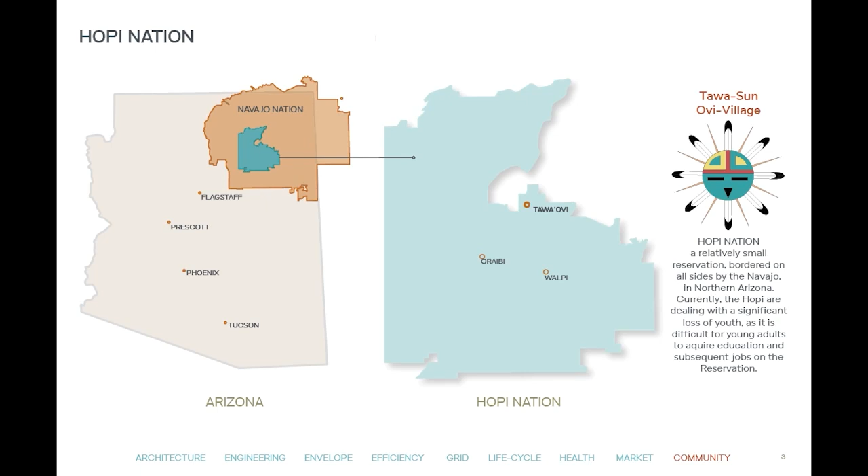Native Peoples Design Coalition at the University of Arizona facilitated a partnership between our team and the Hopi Tribal Council. The council provided a flexible master plan for a new village, Tawaovi. Tawaovi roughly translates to Sun Village. The hope for the future village is that it will celebrate Hopi culture in a modern way and create opportunities for the Hopi people to flourish.

Hopi Nation uses a clan-based land system where land is passed from generation to generation within each clan. This new village will be built away from land currently owned by other clans with no political or sacred implications. The site currently has limited access to necessities such as grocery stores, public transportation, and healthcare options. The main grocery store, Bashas', is 1 hour away by car, while public transportation and healthcare options are at least a 5-hour walk. The nation as a whole is car dependent, making commercial spaces within walking distance a priority.

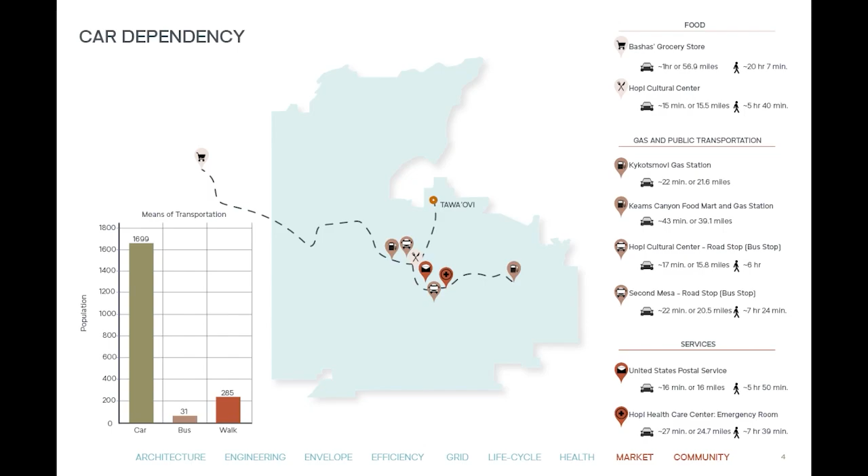When we started this project in January, we traveled to the Hopi Nation to speak with members of the tribe and get an understanding of their culture and their desires for the project. Key cultural practices and values they wished for us to prioritize included an emphasis on food and the communal nature of cooking, agricultural traditions such as dry farming, water conservation, stewardship of the land, and unity. These cultural values became the backbone of our design responses.

Communal spaces, large open kitchens, terrace roofs, increased solar production, radiant flooring, and rainwater collection were all incorporated to promote sustainable and healthy living for generations to come. The goal of this development is to bring more educational spaces, housing, and employment opportunities to encourage Hopi youth to return to the reservation if they've left or stay within the community.

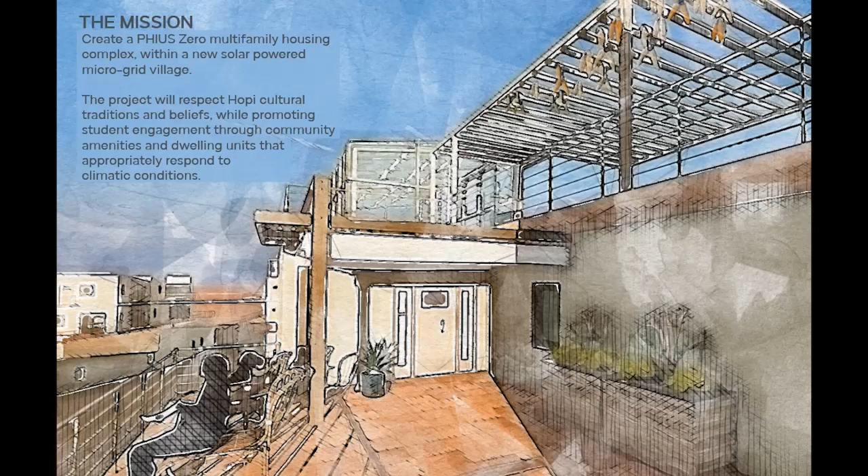Of the registered tribal members, 70% of them have a family, and about 50% of Hopi people have had experience with higher education. Therefore, it's important to provide housing and commercial amenities that accommodate their educational, mental, and emotional needs. Our mission is to create a PHIUS Zero multifamily housing complex within a new solar power microgrid village. The project will respect Hopi cultural traditions and beliefs while promoting student engagement through community amenities and dwelling units that appropriately respond to the climate.

The project goals address a culture of sustainability by using rainwater collection, a graywater system, and the use of prefab CLT. Exterior terrace spaces create room for traditional activities and provide a sense of visual connection to the land. Using native vegetation for the landscape, as well as replanting those on site, minimizes invasive flora and respects the land itself. Sihi Plaza is communally connected while also providing ample private space, assisting in healthy communal growth.

Due to the minimal access to utilities on site, all three teams from the U of A have coordinated the development of a microgrid to assist in creating energy independence for the Hopi tribe. Sihi Plaza houses students for an adjacent technical education campus. The plaza provides commercial amenities that are essential in the master plan of the Tawaovi community.

Because we're in ASHRAE Climate Zone 5B, an emphasis is placed on access to sunlight. Therefore, Sihi Plaza's form maximizes on southern solar exposure. To sustain life, there must be sun and water. So, a combination of gravel runoff collection skirts at the base of each building, drainage concrete pavers, and native plant bioswales collect, distribute, and use water. The Tawaovi Development Guidelines have requested trash compactors, native plant spaces, and fire access roads.

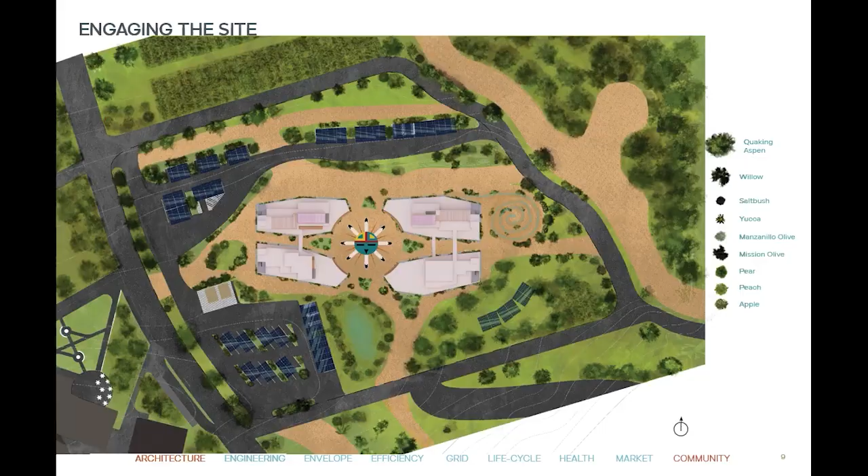We have honored these requests and continue to be following their guidelines in our construction. Solar power is produced with photovoltaic parking shades, rooftop panels, and ramadas on the north and southeast areas of the site.

Hopi architecture traditionally incorporates plazas for cultural celebrations. The central pavers depict Tawa, the sun god. This grounds the plaza, making it an ideal space for ceremonies.

To assist the Hopi in stimulating the economy, creating new jobs, and reducing car dependency, the first floor is programmed with a variety of commercial and community services. A post office and laundromat provide needed basic services.

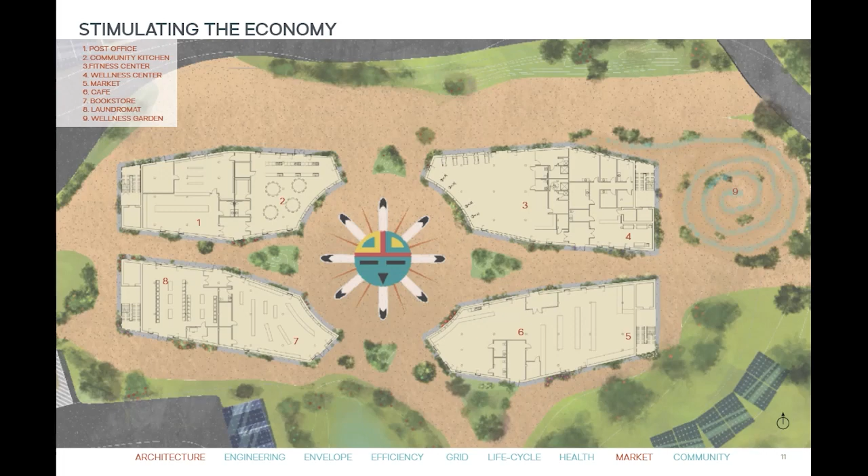The combined market and cafe address the food desert condition on site, while also providing a space for students and the surrounding community to enjoy meals with each other. The first floor commercial spaces are not only accessible to the residents of Sihi Plaza, but all Hopi. The community kitchen provides a space for cooking classes, celebrations, and social events.

Some of the elders expressed a concern for maintaining health in the community, so a fitness center was incorporated for all Hopi on the reservation to maintain their physical well-being. Indoor treadmills as well as an outdoor running path provide two ways for Hopi people to express their love of running.

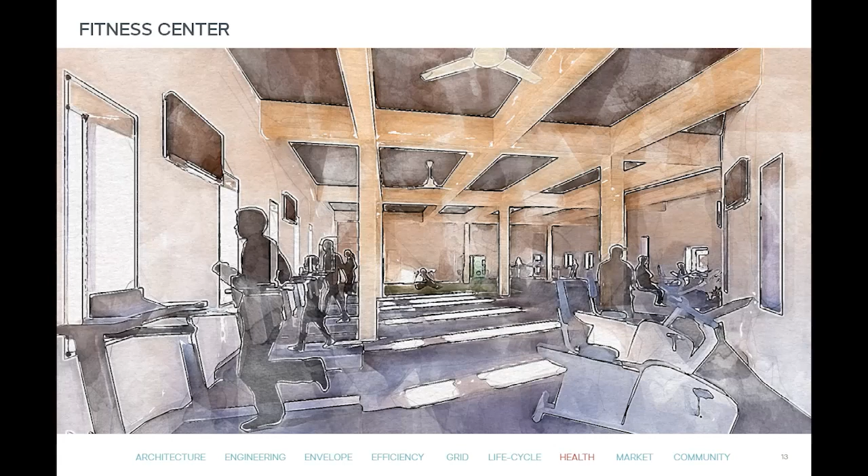The bookstore works to amplify the voices of Hopi authors by selling books from writers in and around the Hopi community. The second and third floor have 12 dwelling units, which can house up to 27 residents. These units range from 1 to 4 bedrooms, and 75% of them are ADA accessible.

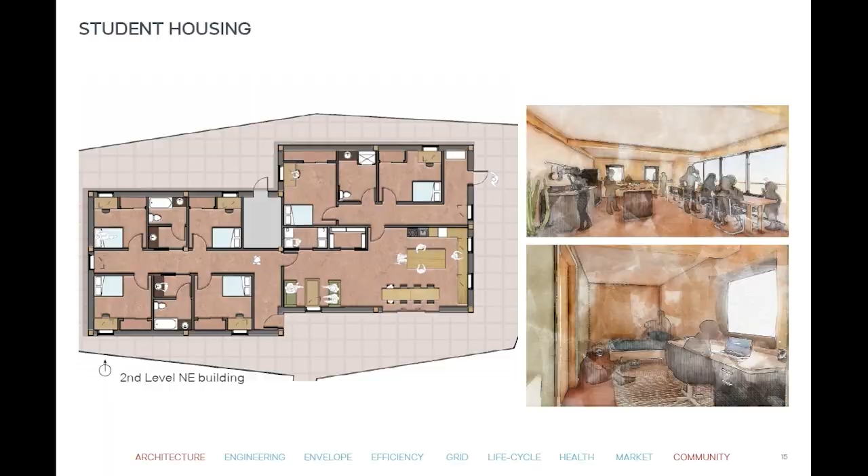Residents can access these spaces using an elevator or staircase located at each end of the building. The units are connected by communal living spaces featuring large open-plan kitchens and an in-unit laundry. The communal spaces allow students to engage in a more public area while maintaining privacy with their own bedrooms and bathrooms. All of the residential units have access to outdoor terraces to encourage students to engage with nature and each other.

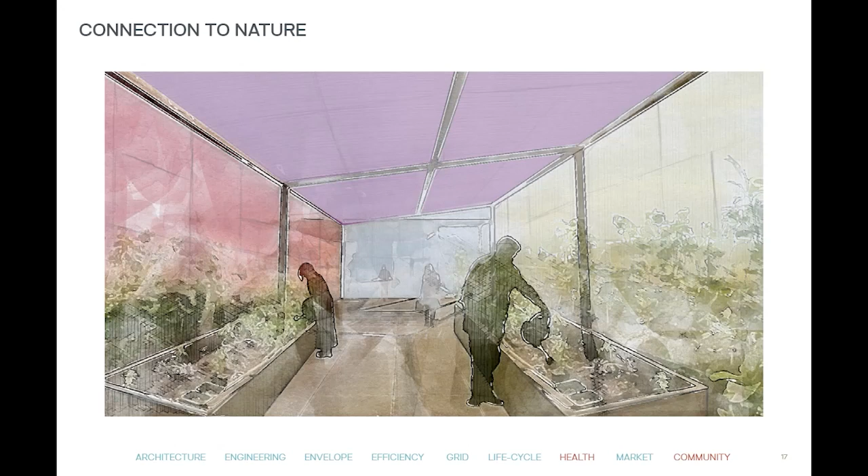The fourth floor spaces of the northern buildings include 2 greenhouses and wooden ramadas for drying agricultural goods. The colors utilized on each face of the greenhouse are meant to respect Hopi cultural traditions, where each cardinal direction is associated with a color.

All of the materials incorporated in the project were selected with cost, longevity, and environmental impact in mind. The glulam throughout the project is locally sourced. The lime-based paint and plaster, sourced from California, have no VOCs, are hypoallergenic, mold-resistant, and carbon sequestering.

The butcher block countertops used in the kitchens are made from salvaged wood, and the bathroom countertops are PaperStone, which is crafted from recycled paper and petroleum-free resin. The floors are finished with Marmoleum, which is a 97% natural material with a minimal carbon footprint. The majority of these materials are also from relatively local companies throughout the western part of the United States in order to reduce the embodied carbon footprint.

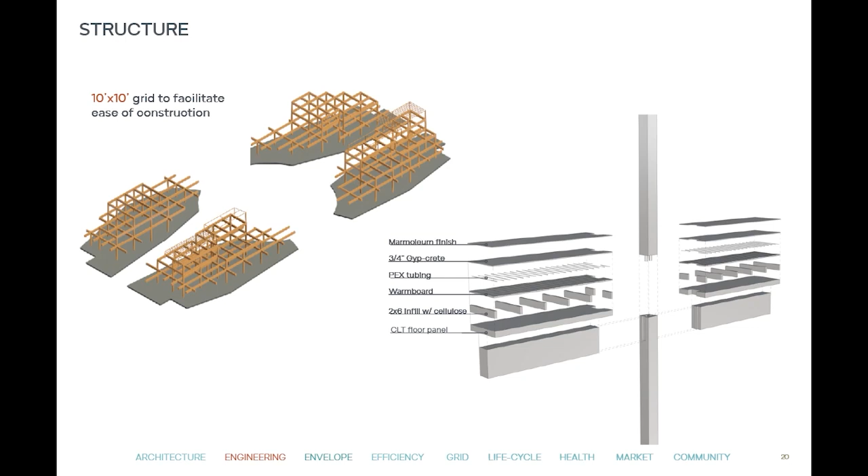The structure of the building is composed of glulam southern pine columns and beams, and the floors are structured with cross-laminated timber panels with a radiant flooring system. The floor is finished with Marmoleum, which is a sustainable alternative to vinyl. The wall is a well-insulated prefabricated panel from Timber Age Systems, which will act as a continuous curtain wall connecting to the columns in order to prevent thermal bridging.

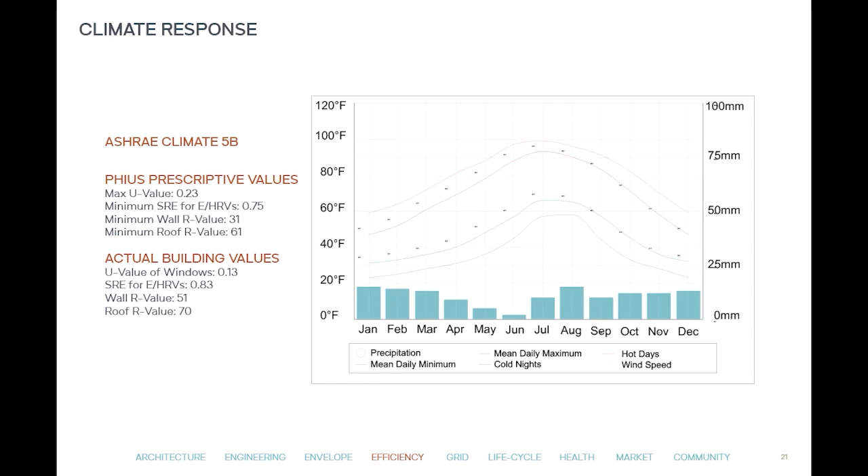Tawaovi is located in ASHRAE climate zone 5B. PHIUS's prescriptive values were utilized as a baseline to create an efficient envelope. This efficient envelope, developed with Timber Age Systems prefabricated panels, was chosen for a few main reasons. The modular system helps reduce construction cost, time, and carbon impact.

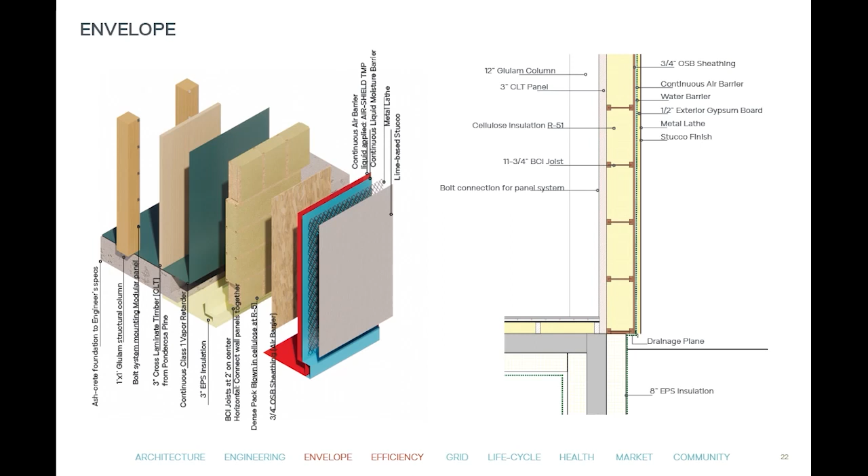Additionally, Timber Age has offered to teach tribal members how to fabricate and assemble the panels on site. The CLT in the panels is beetle kill ponderosa pine that would otherwise go to waste or contribute to wildfire risk. Alpen Windows is a Colorado-based company with experience in furnishing windows for passive house design. The proximity to site and the quality of their windows were justification for choosing this company.

The Hopi expressed a concern with dust infiltration, so tilt-turn windows were selected in order to allow occupant ventilation control while inhibiting dust from lowering indoor air quality. The south-facing windows have a solar heat gain coefficient of 0.5 in order to maximize winter solar gain. The west-facing windows have a solar heat gain coefficient of 0.3 in order to minimize evening sun heat.

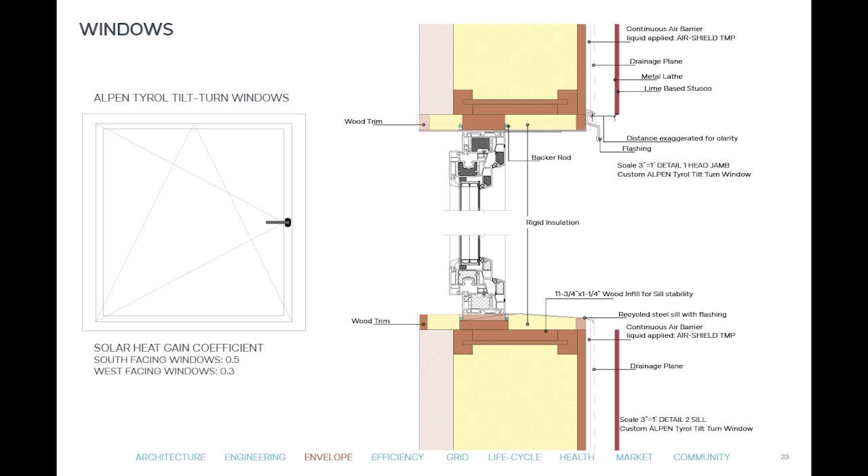Radiant flooring is well suited for this climate as there are many days throughout the year which are cold and dry. The heat pump will heat up the water and feed into a buffer tank where the water is held at a consistent temperature in order to assist with peak load hours. The manifold is used in order to control where the water will go throughout the building, allowing different zones and rooms to control their temperatures.

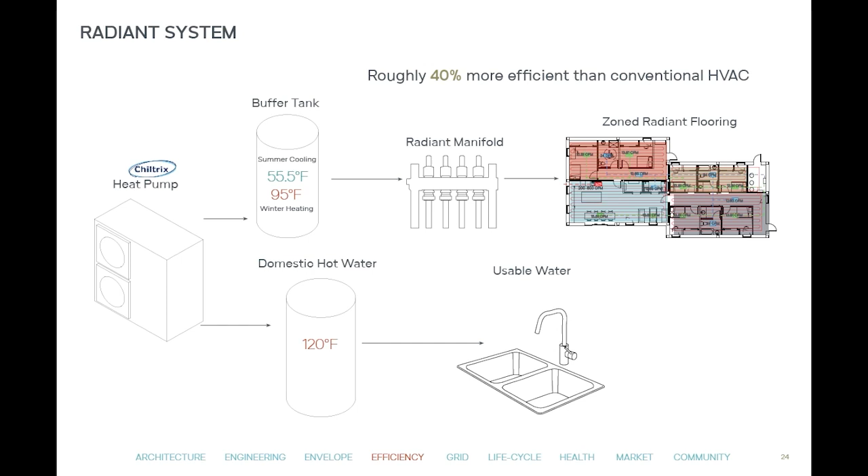The ventilation system utilizes Zehnder ERVs to ensure proper airflow in the building. The building meets PHIUS standards in regards to air changes per hour for the different types of spaces.

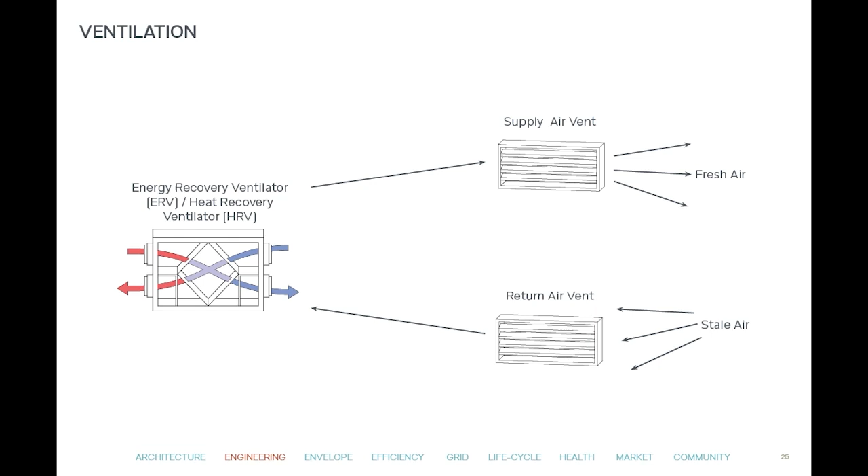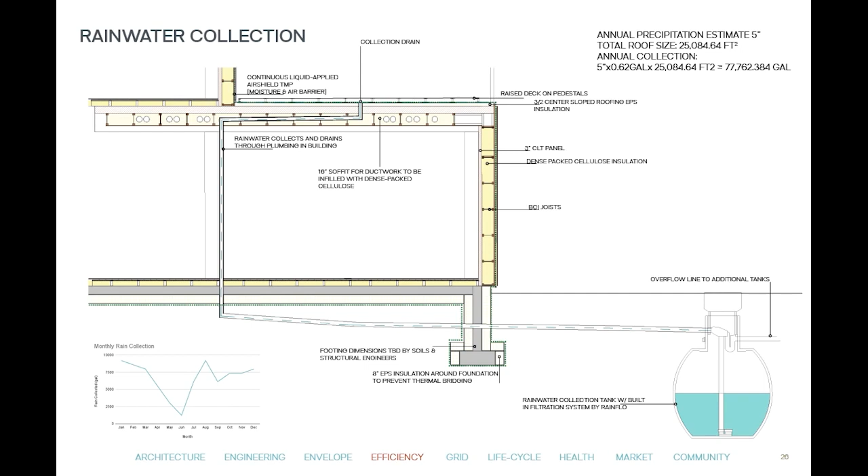Hopi people practice water conservation in a variety of ways, including dry farming, where the irrigation of crops relies on rain, and collecting gray water in order to water garden plants. Sihi Plaza incorporates both a gray water system to irrigate plants and a filtered rainwater catchment system that provides potable water. These choices help to greatly reduce the project's water footprint and honor cultural values.

The budget is currently $16.7 million, which is approximately $400 per square foot. Given the remote location of the site, labor and transportation costs were difficult to predict. However, this current budget was provided to give the Hopi people a clearer goal for funding. We do believe that fabrication of the CLT panels on site by Hopi tribal members will stimulate the economy while helping to reduce the overall cost for this project and future projects in Tawaovi.

Sihi Plaza runs from an islanded DC microgrid, but it's not alone. Many of the Tawaovi community microgrids are connected through a commercially available system called Block Energy. Power from the solar grid and individual microgrids are shared and optimized by a Block central control system. This redistributes and responds to equitable need in the Tawaovi community. For example, an outage will direct and focus critical load systems to power perishable food storage, lighting, and other essential utilities.

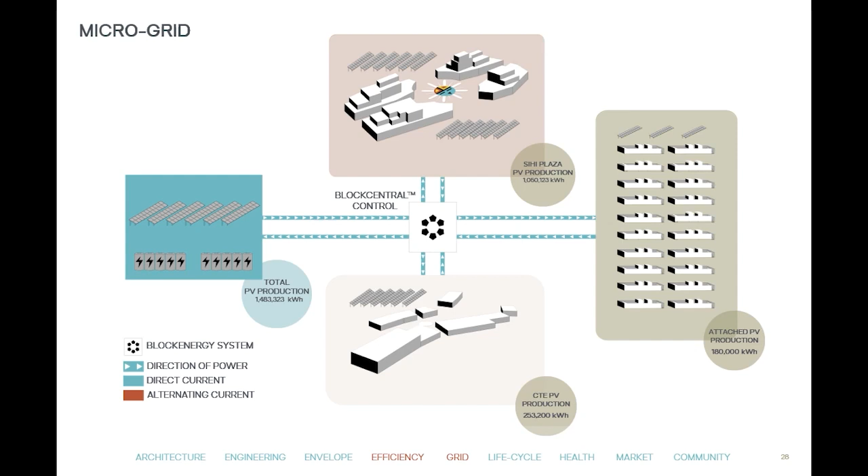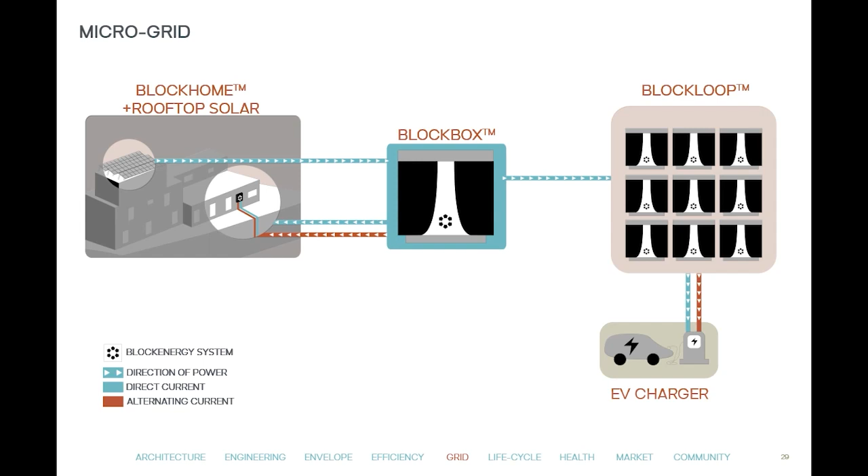BlockHomes contain a BlockBox, sensors, battery storage, and built-in DC to AC inverters. Rooftop solar panels first produce DC electricity, which is then transferred to BlockBoxes, which is shared in a BlockLoop, or our microgrid. Then, power from the BlockLoop can be distributed to electric vehicle chargers, as well as charge additional BlockHome batteries connected to the system.

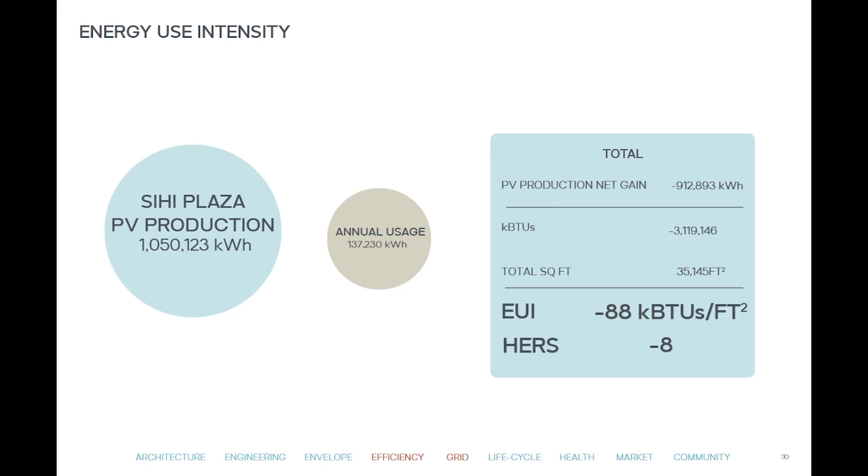We have a projected energy use intensity of -88 and a home energy rating index of -8. Sihi Plaza uses about 15% of the overall electricity it produces annually. 35% of our power is sent to other microgrids, and the remaining 50% is used to charge about 100 electric vehicles annually. The hope for Sihi Plaza and the village of Tawaovi is to provide the Hopi with a precedent for future developments where they can exercise their sovereignty while preserving traditions.

As we continue to develop the project within the coming weeks, we will meet again with Hopi tribal members to ensure we are focusing on their main goals, including water conservation, energy sovereignty, and expanding community growth. We will be addressing our water conservation by further developing and clarifying our rainwater collection systems, as well as our gray water system. We will continue coordinating with BlockEnergy with the hopes of finalizing the plans and budget for the microgrid. And when we meet again with the Hopi people, we want to ensure that the commercial program satisfies their desire for community growth and fulfills their need for economic stability.